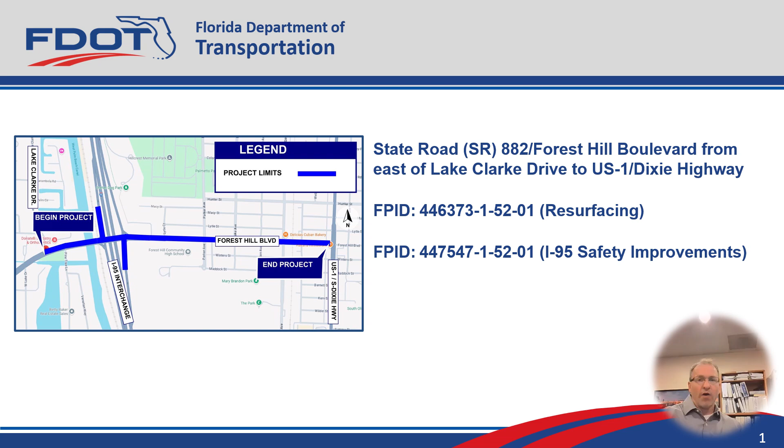These improvements include milling and resurfacing of Forest Hill Boulevard from east of Lake Clarke Drive to US 1 Dixie Highway, as well as safety improvements to the northbound and southbound off-ramps at the I-95 interchange with Forest Hill Boulevard. This project is consistent with financial management project number 446373-1-52-01, which is the resurfacing portion, and 447547-1-5201, which is the safety improvements at the interchange.

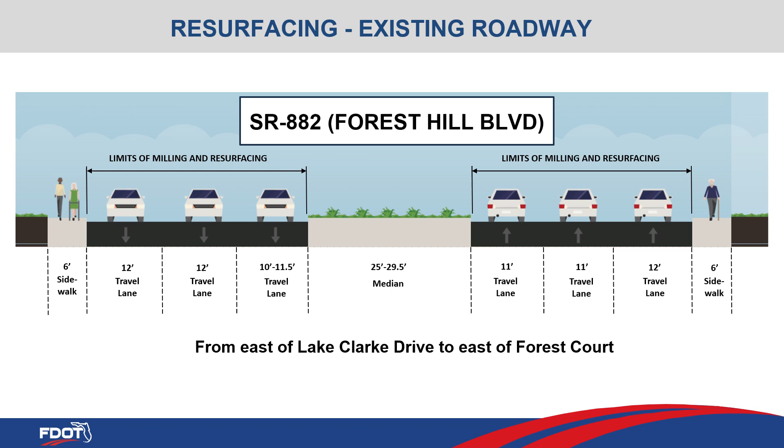Along Forest Hill Boulevard, from east of Lake Clarke Drive to east of Forest Court, the project consists of milling and resurfacing the existing roadway, which is a 6-lane divided urban roadway with the following features. There are two 12-foot outside travel lanes and one 10 to 11.5-foot travel lane in the westbound direction. There are two 11-foot inside travel lanes and one 12-foot outside travel lane in the eastbound direction. There is also a raised center median and a 6-foot sidewalk, which are both to remain.

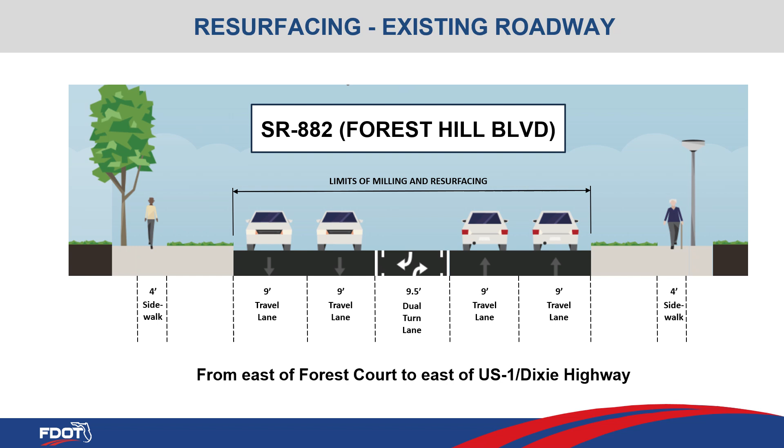From east of Forest Court to east of US 1 Dixie Highway, the existing roadway is a 5-lane urban roadway with the following features. It has two 9-foot outside travel lanes in the westbound direction and a dual center turn lane measuring about 9.5 feet of width in the center. There are two 9-foot inside travel lanes in the eastbound direction and a 4-foot sidewalk on either side.

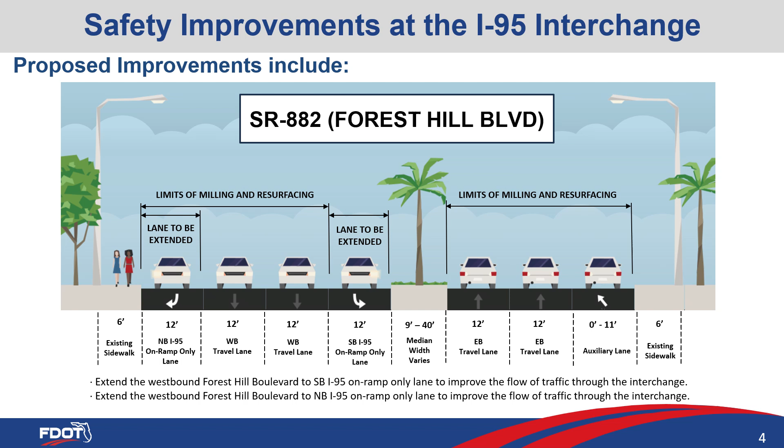In addition to the milling and resurfacing on Forest Hill Boulevard, the safety improvements at the I-95 interchange include extending the westbound left turn lane at Forest Hill Boulevard to the southbound I-95 on-ramp, as well as extending the westbound right turn lane at Forest Hill Boulevard to the I-95 northbound on-ramp. This will help improve the flow of traffic all the way through the interchange.

In addition, the left turn lanes will also be extended to increase storage space for more vehicles at this intersection. This will help improve the westbound traffic flow and increase safety at the intersection.

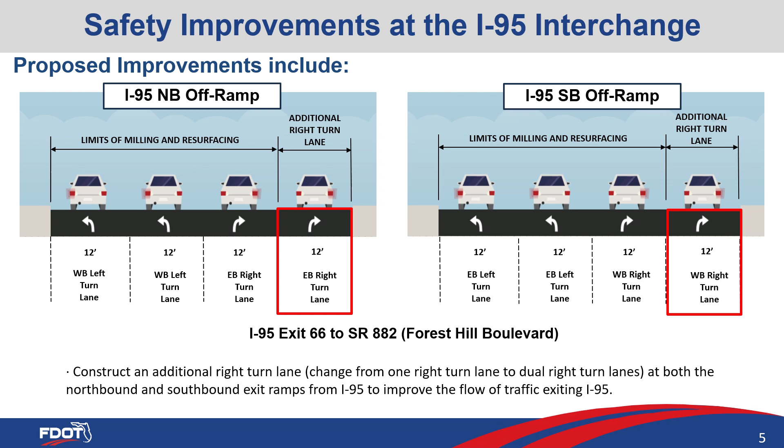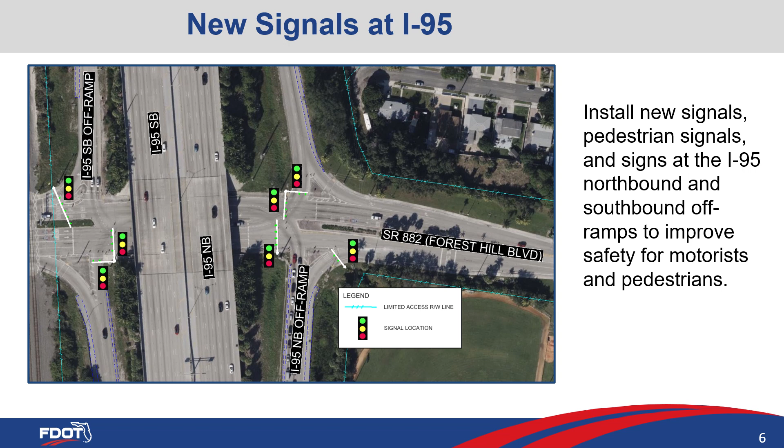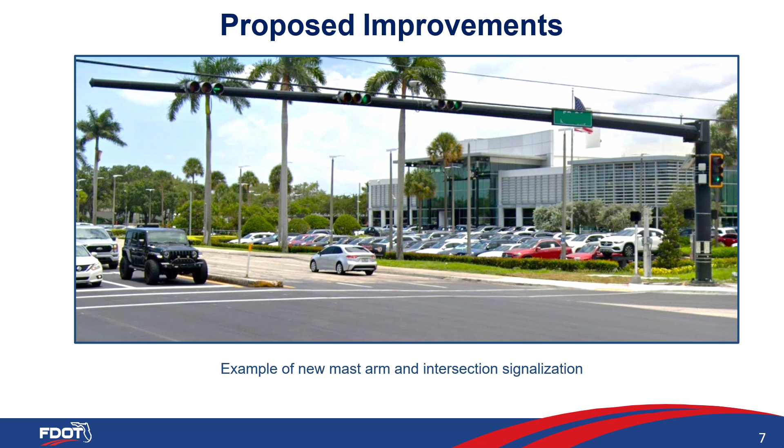Also included with this project is replacing the existing outdated pedestrian signals with new countdown pedestrian signals, which show the number of seconds left to cross the street. These enhanced pedestrian features will be placed at the following intersections: Pine Tree Lane and Forest Court, and as mentioned previously, at the I-95 interchange.

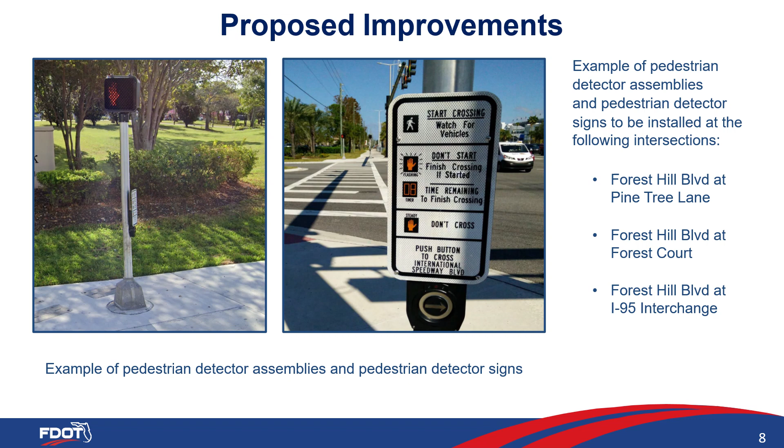Roadway lighting is another important safety feature on roadways. Therefore, we will be upgrading the existing lighting along both the northbound and southbound exit ramps along I-95 to improve the visibility for drivers.

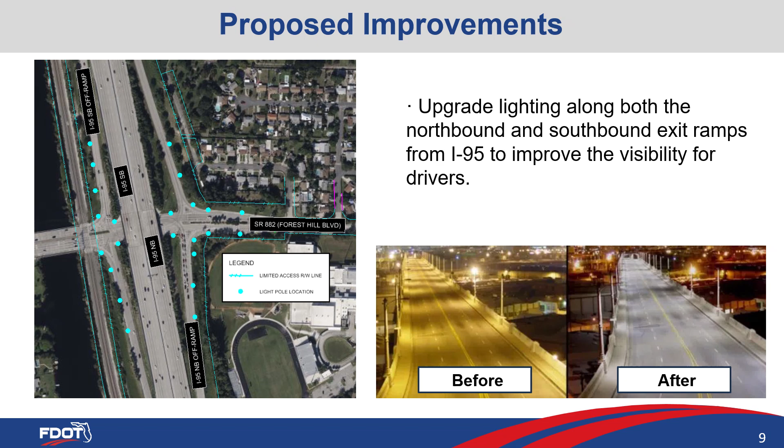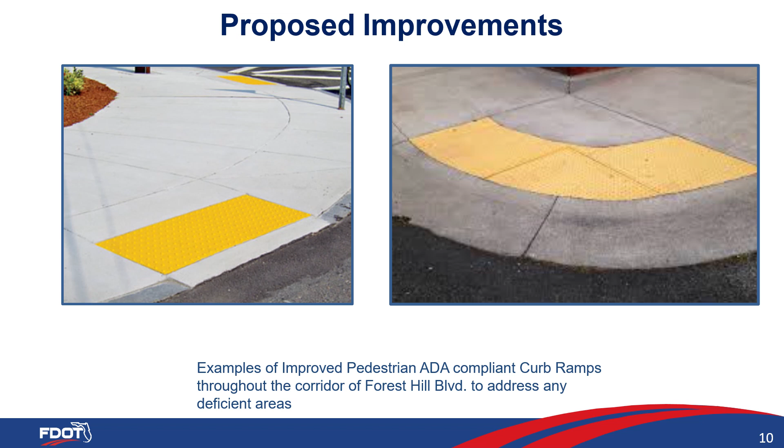This project also involves reconstructing pedestrian curb cut ramps throughout the corridor of Forest Hill Boulevard, as well as replacing or repairing any damaged sidewalks and detectable warning surfaces. The graphic here shows an example of the improved pedestrian ADA compliant curb cut ramps and what they would look like. For additional safety enhancements, this project proposes to replace and upgrade signs and pavement markings to meet current standards and increase reflectivity.

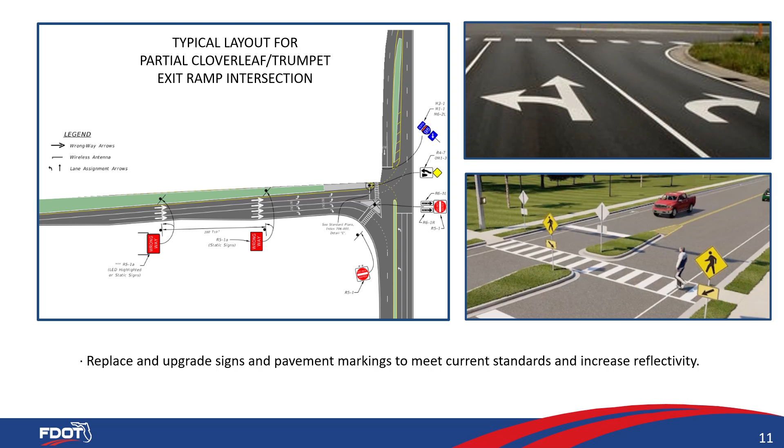While construction is being done on this project, our contractor will work in phases to reduce any inconvenience to the community. Lane closures will occur only in one direction and one lane at a time during non-peak hours to minimize any impacts to traffic. We're not anticipating any full roadway closures, and we also understand that access to residents and businesses is very important to the community.

Therefore, access to adjacent properties will be maintained at all times. And we are not anticipating any detours for this project.

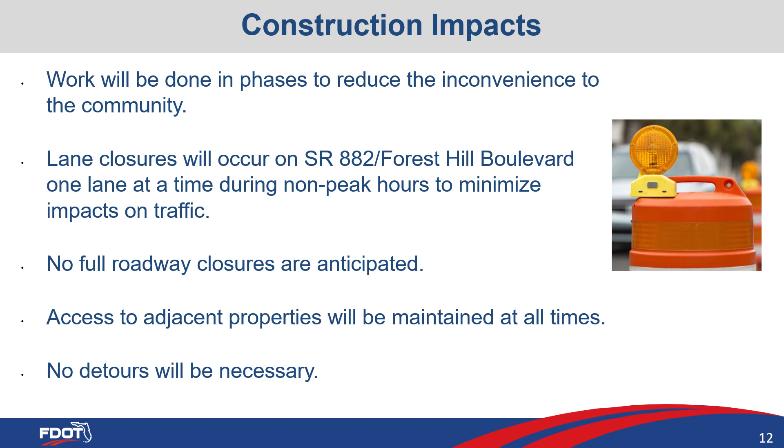The production schedule for this project is as follows. Final design completion is estimated in January of 2026. The letting, or bid opening, is scheduled for July of 2026. The estimated construction start is sometime in the fall of 2026. The estimated completion is about a year later, in fall of 2027.

The estimated construction cost for the milling and resurfacing portion, FM number 446,373, is approximately 2.7 million. And for the safety portion of the project, FM 447,547, is approximately 4.7 million.